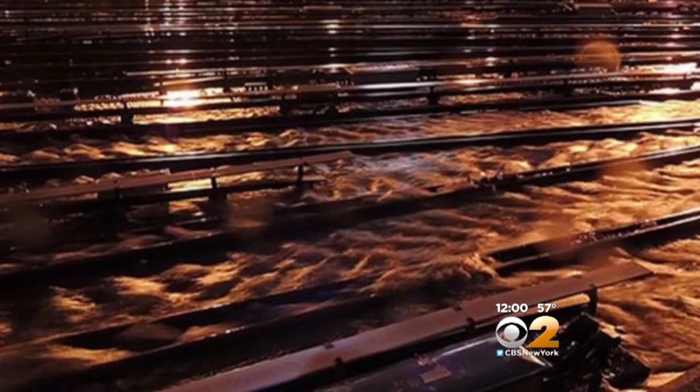At 4:30 in the morning on July 21st, 1880, a small leak opened at the top of an unfinished tunnel, buried 60 feet under the Hudson River. It was no larger than a man's hand. Within minutes, compressed air was rushing out of it, and river silt was pouring in. 28 men were inside. 8 of them would reach the airlock alive.

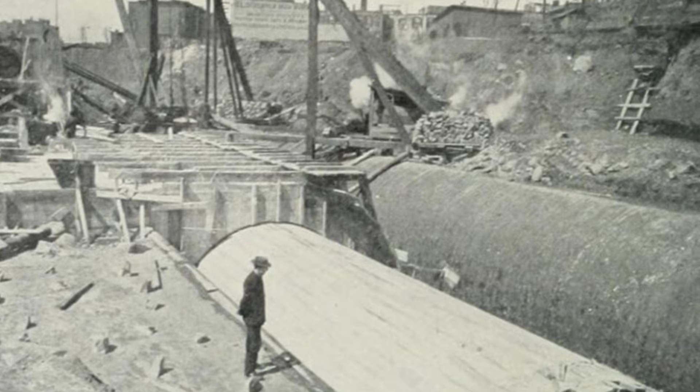The others would remain there, sealed beneath the riverbed, while engineers above stood on the Jersey City shore and tried to understand what had just happened. The project would not move forward in any real sense for the next 18 months. What stopped it was not money nor politics. It was the river bottom itself.

By the 1860s, the Hudson River had become the largest single obstacle to commerce on the east coast of the United States. Manhattan was a peninsula crowded with industry, finance, and immigrant labor, and yet every railroad coming from the south, the west, or the interior of the country ended its tracks on the New Jersey side. Goods and passengers had to be carried across the water on ferries. In ordinary weather, the crossing took roughly 20 minutes. In fog or ice, it could take hours, or it could fail altogether.

The winter of 1867 was one of the worst on record. Ferries got stuck in ice. Coal shipments stopped. Manhattan came close to running out of fuel. A man named DeWitt Clinton Haskin, an engineer who had made his money on the California Pacific Railroad and on silver mines in Utah, was on one of those stranded ferries. By the time he reached shore, he had decided that the only durable answer was a tunnel.

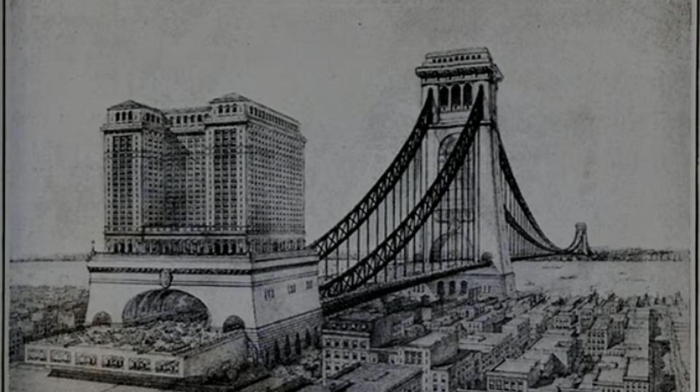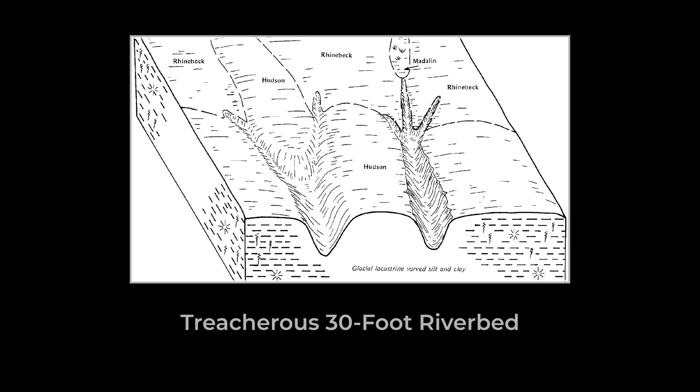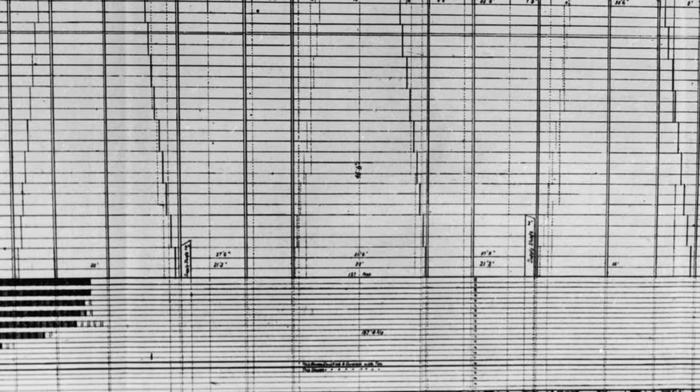A bridge had been studied repeatedly and rejected. The Hudson at that point was a mile wide, with shipping channels too active to obstruct, and a riverbed that consisted in long stretches of soft mud reaching down dozens of feet before it touched anything solid. Engineers of the period believed a bridge there would be impossible to anchor without piers driven down to bedrock, an undertaking no one in the country knew how to attempt at that depth. A tunnel, in theory, could simply be threaded through the silt below the river.

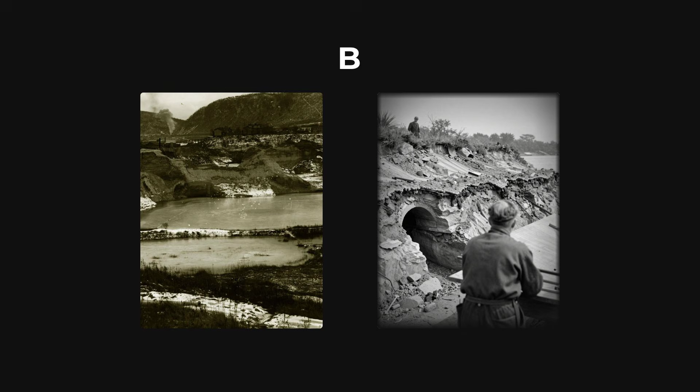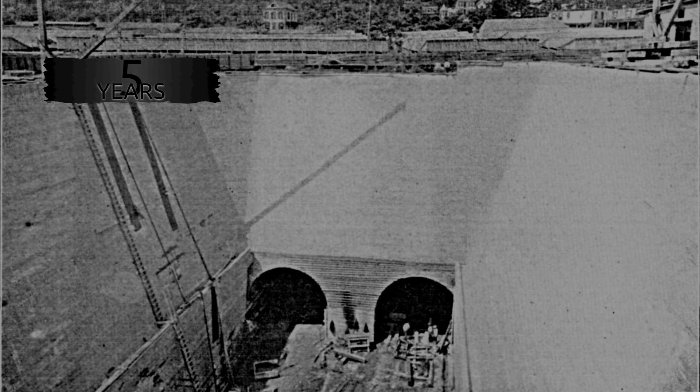In theory. Haskin incorporated his Hudson Tunnel Railroad Company in 1873 and began sinking a construction shaft at the foot of 15th Street in Jersey City the following year. Almost immediately, he was sued by the Delaware, Lackawanna, and Western Railroad, which ran ferries across the same stretch of water and saw a tunnel as a threat to its business. The injunction held the project in place for 5 years. Equipment sat under tarps. Investors grew restless. Work did not resume until late 1879.

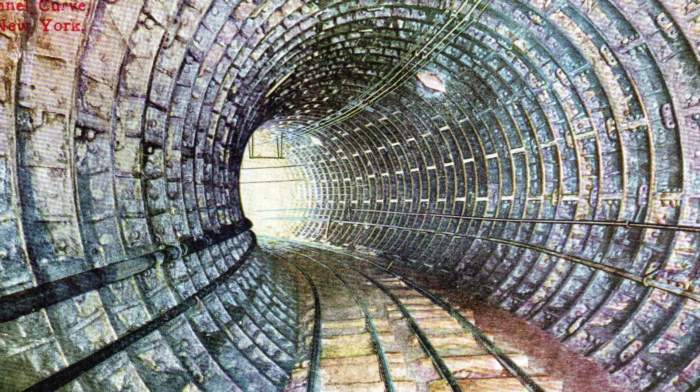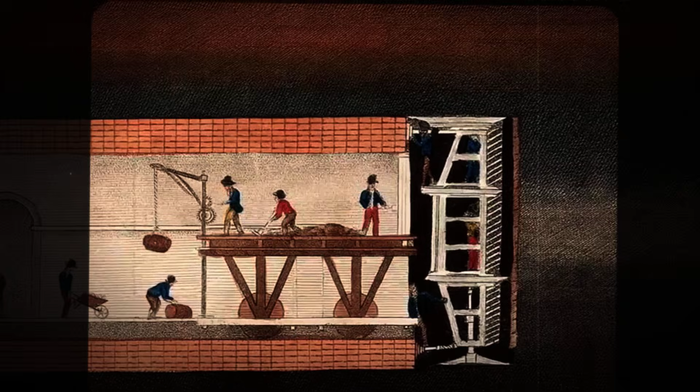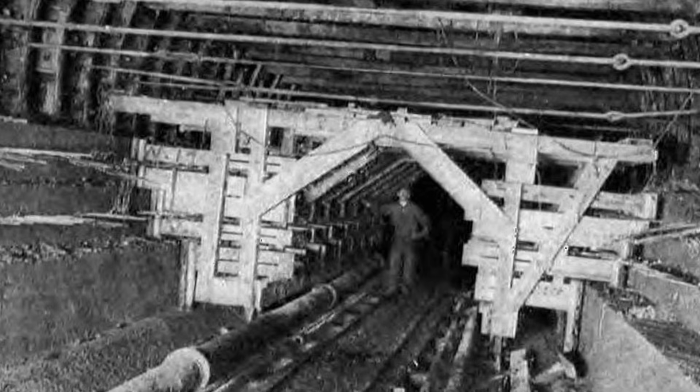When it did, the method was unusual for its time. Haskin chose not to use a tunneling shield, the heavy steel cylinder that British engineers had been refining since the 1860s for soft ground work. Instead, he relied on compressed air. The plan was to push the air pressure inside the tunnel up to roughly 35 pounds per square inch, enough, in theory, to hold back the river above and keep the silt walls in place, while workers laid an iron and brick lining behind them.

Men entered through an airtight chamber at the rear, pausing several minutes inside to let their bodies adjust, and then worked at the unsupported face with shovels and picks. The silt of the Hudson, when it carried just the right amount of moisture, behaved almost like clay. It would stand on its own. Haskin had observed this and designed his entire method around it.

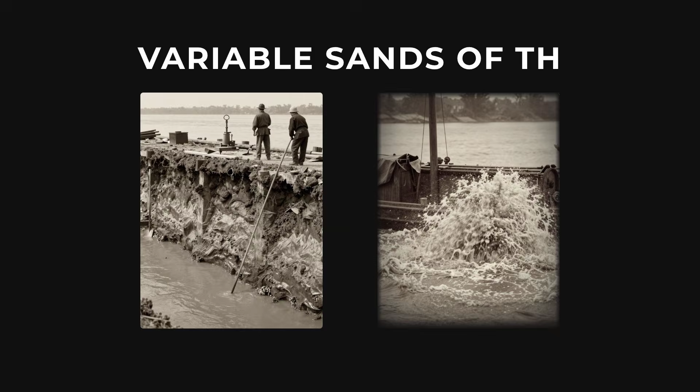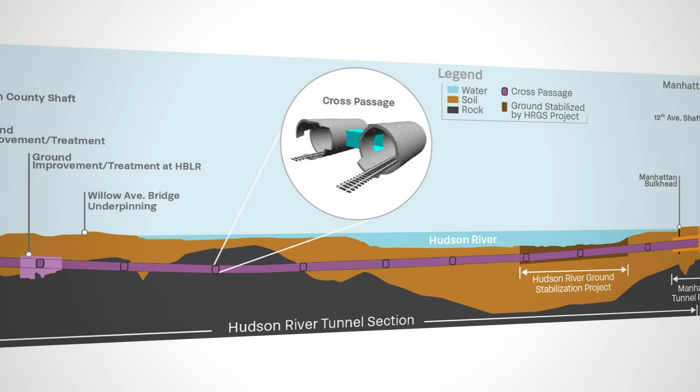What he did not fully account for was that the silt was not uniform. Its moisture changed from yard to yard. Its density changed. The pressure required to hold back water at the bottom of the tunnel was much greater than the pressure required at the top, where the silt was thinner and the river was closer. Any single value of compressed air would always be too much in one place and too little in another.

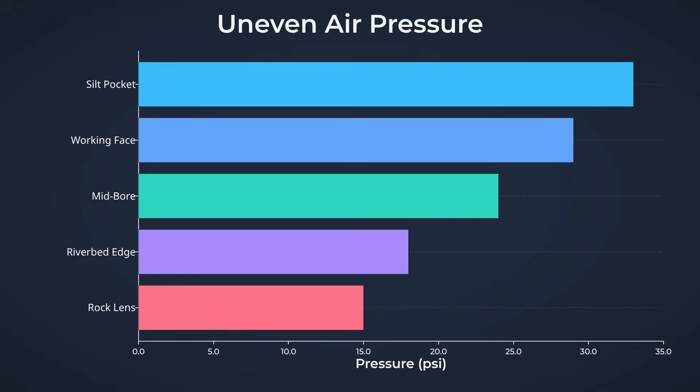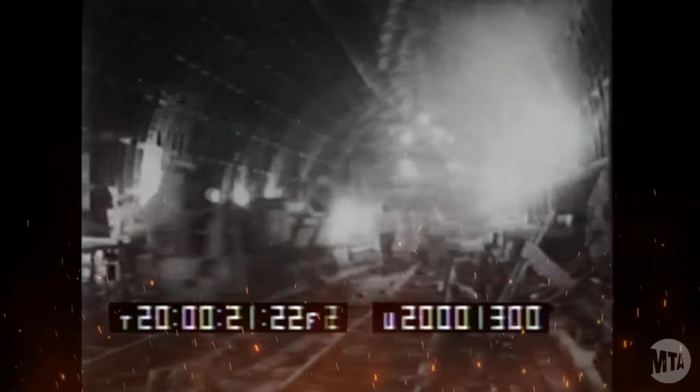The men working the face could not see this, and neither could the engineers reading the gauges. By the summer of 1880, the tunnel had advanced about 300 feet into the river. Work continued through the night in shifts. On the early morning shift of July 21st, the assistant superintendent on duty was a man named Peter Woodland. He was English by birth, an experienced sandhog, and had been with the project since it resumed the previous autumn.

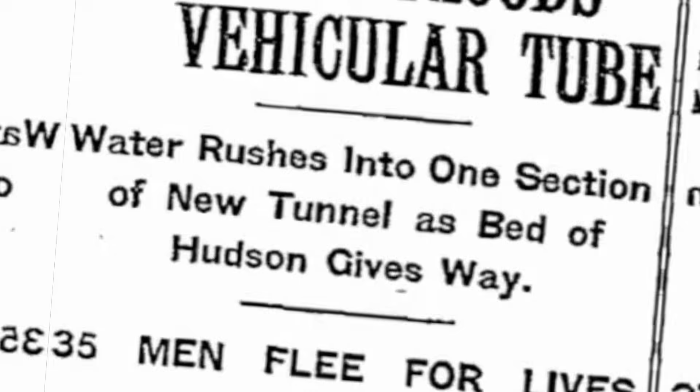A few minutes past 4:30, Woodland noticed a hiss at the top of the tunnel face. The compressed air inside the workings had found a soft pocket in the silt above and was escaping upward. As the air went out, the seal failed. River water and mud began coming in through the same opening. Woodland understood immediately what was happening.

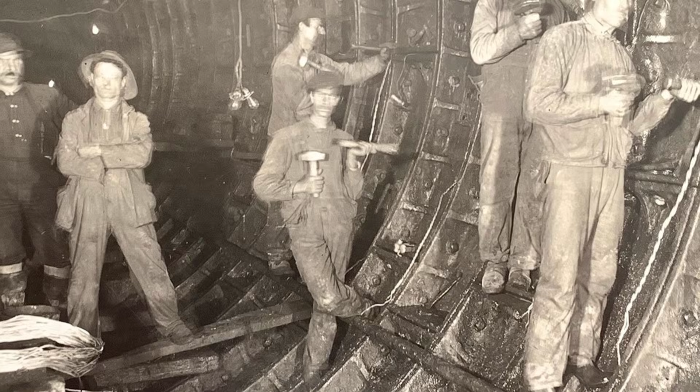He ran to the airlock at the rear of the tunnel, opened it, pushed 8 men inside, and sealed the door behind them. He did not go in himself. The 8 men in the lock survived. Woodland and 19 others did not. The tunnel filled with water and collapsed silt within minutes.

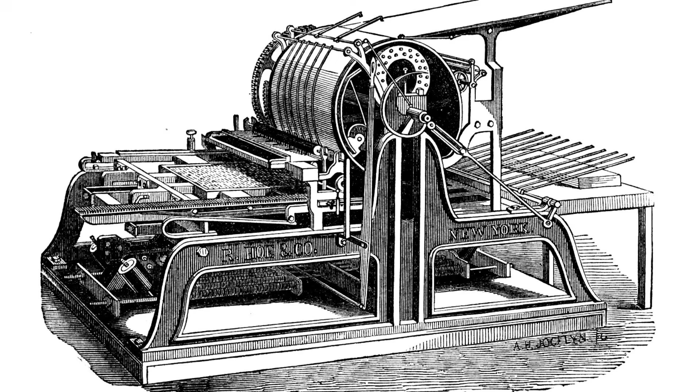When daylight came, there was a visible disturbance on the surface of the river above the tunnel line, a churning of mud and air bubbles that lasted for hours. Boats slowed and watched it. The newspapers in both states ran the story by the afternoon edition. It took 6 months to recover the bodies of the men who had been trapped. The flooded chamber could not simply be pumped out. The walls had failed. The silt was no longer holding.

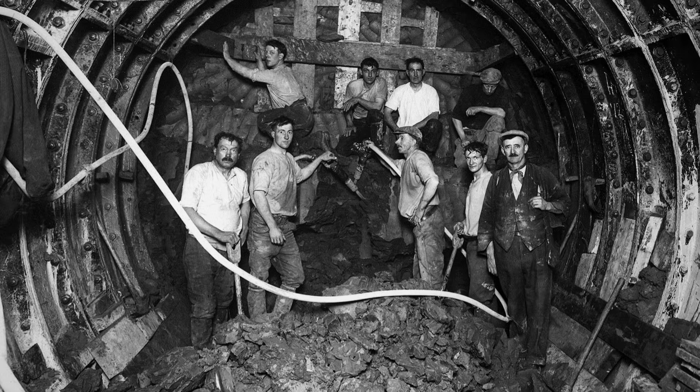At the inquest that followed, Haskin stood up and declared that he, and he alone, was responsible for the plans and for their execution. The statement protected his employees, but it permanently damaged the company's standing with its lenders, several of whom withdrew their support within the month.

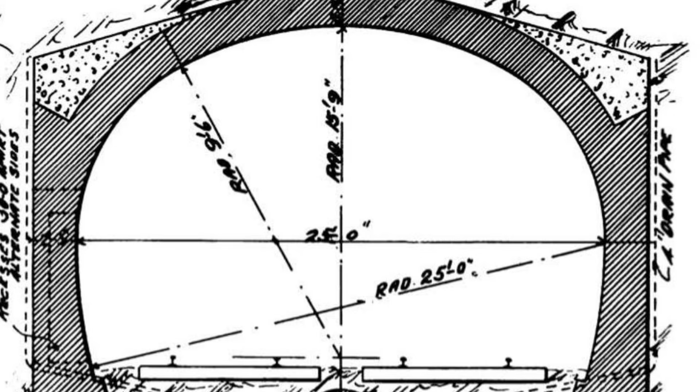What followed was the long pause that defined the whole project. The tunnel, as a working construction site, was effectively shut down for the next year and a half. There was no formal announcement. Funding continued to trickle in. Investors continued to attend meetings, but no useful tunneling was possible until engineers could solve the problem the river had just demonstrated. The first task was recovery.

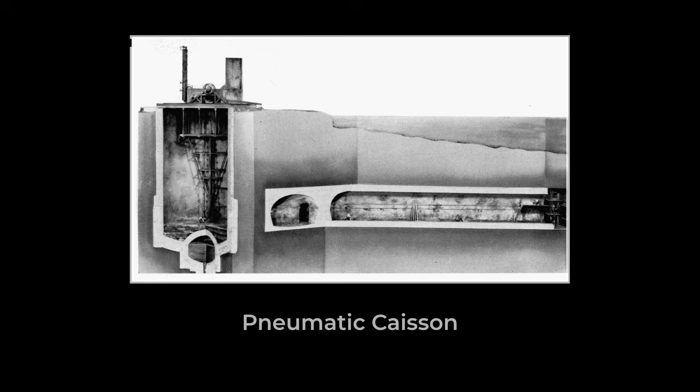A cofferdam was driven into the riverbed above the failed section, enclosing a rectangle of water and mud that could then be drained. Inside the cofferdam, a pneumatic caisson, roughly 40 feet long and 24 feet wide, was sunk down to the level of the tunnel itself. From inside that caisson, workers reached the buried chamber, removed the dead, and began the slow process of rebuilding the damaged lining in masonry rather than brick. The cofferdam alone took months to install in the moving river.

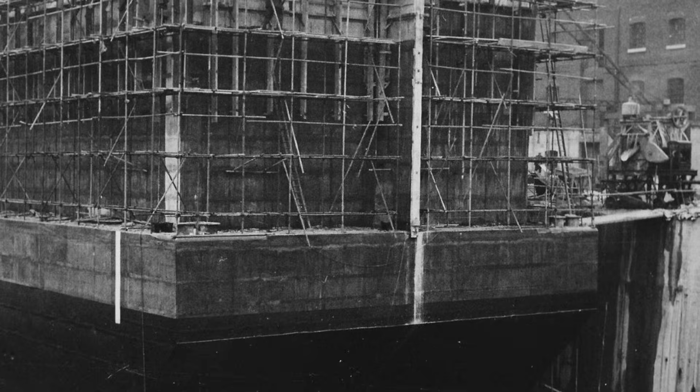The caisson took longer. While that was happening, the engineering review was running in parallel. A new chief engineer, General William Sooy Smith, was brought in. Smith was a respected figure in American civil engineering, with experience on bridge foundations and pneumatic caisson work in the Midwest. He looked at Haskin's design and found it wanting in 3 specific places. He introduced changes that should have been part of the original plan from the beginning.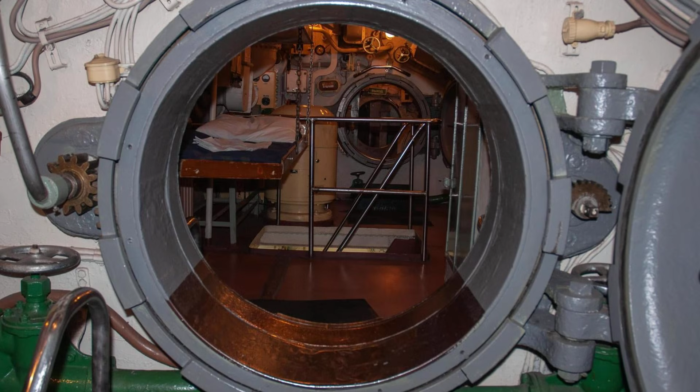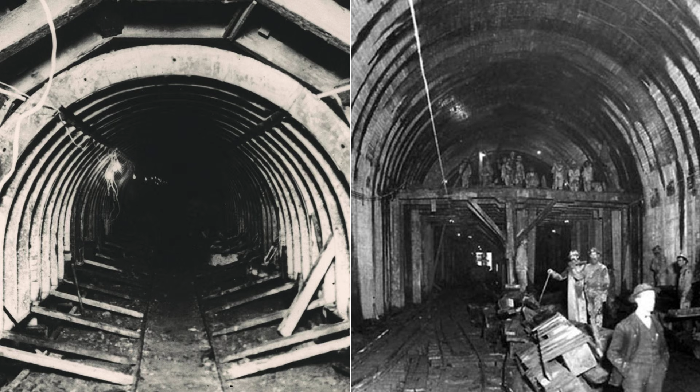First, Smith installed a permanent bulkhead near the tunnel face, with its own dedicated airlocks, so that workers could be sealed off in seconds if pressure failed again. The bulkhead Haskin had used was a simple wall of concrete with a single airlock, suitable for routine entry but useless in an emergency. Second, Smith replaced the brick lining with concrete, which could be poured in continuous sections and was less likely to crack under uneven pressure.

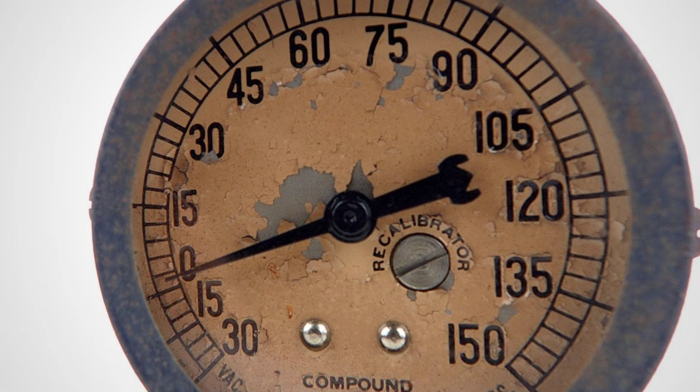Third, he added a pressurized discharge pipe that allowed excavated silt to be carried out of the tunnel without breaking the air seal at the rear, which had been a daily source of small pressure losses. By January 1882, 18 months after the blowout, a delegation of about 100 engineers from the American Society of Civil Engineers was given a tour of the rebuilt workings.

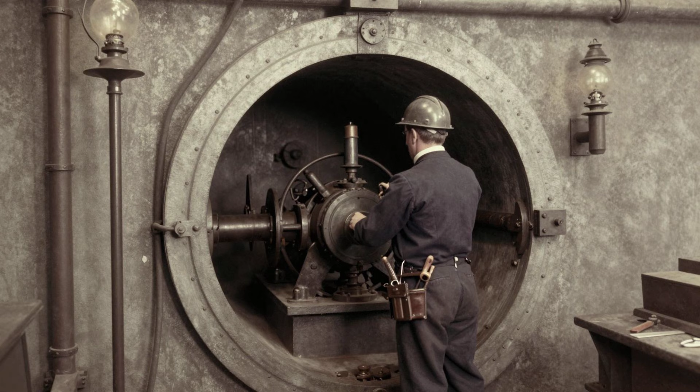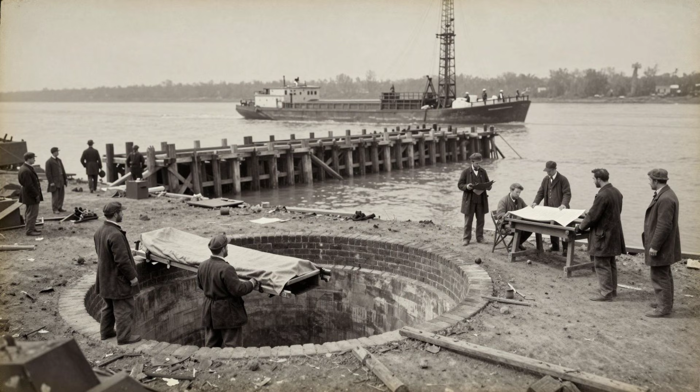They walked through the new airlock, inspected the concrete walls, and were taken later that same day to look at the Brooklyn Bridge, which was still rising over the East River under Washington Roebling. The Hudson Tunnel was alive again, but it was not the same project. The river had taught its lesson, and the lesson had cost 20 lives, the company's reputation, and a year and a half of construction time.

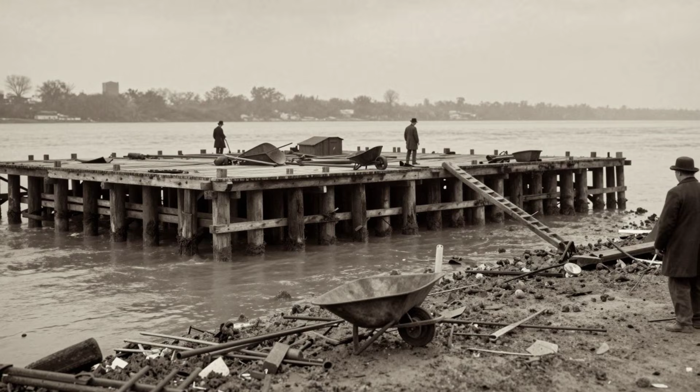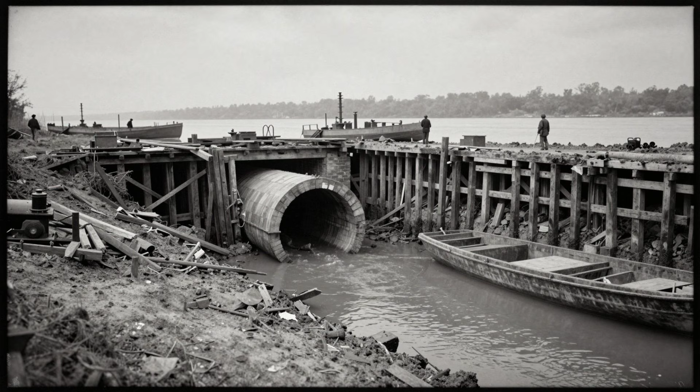The story did not end with the 18-month pause. The tunnel itself was never finished by the men who started it. Haskin's main financial backer, Trenor W. Park, died in late 1882, and the company suspended construction again that November. A second blowout the following year shook investor confidence further. Haskin restarted the work twice and finally exhausted himself in 1887, with about 1,600 feet of tube completed and abandoned beneath the river.

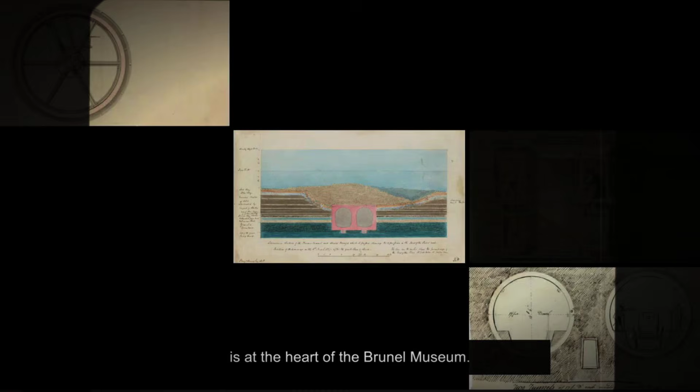A British firm took over the contract in 1888, bringing in something Haskin had refused to use. James Henry Greathead, an engineer working in London, had developed a tunneling shield specifically designed for soft riverbed material. The Greathead shield was a heavy steel cylinder slightly wider than the tunnel itself, pushed forward by hydraulic jacks while workers excavated through openings in its face.

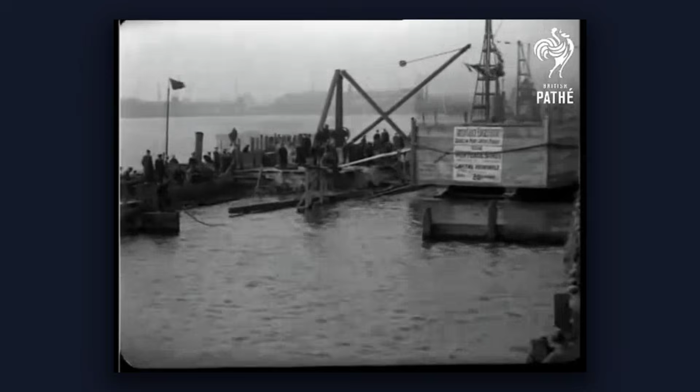The British team, working with Haskin's old compressed air method behind the shield, pushed the work another 1,600 feet before the firm ran out of money in a financial crisis in 1891. For the next 10 years, the half-built tube sat full of water, useful to no one, while the city above it kept growing. In 1902, a Tennessee lawyer named William Gibbs McAdoo bought the abandoned workings.

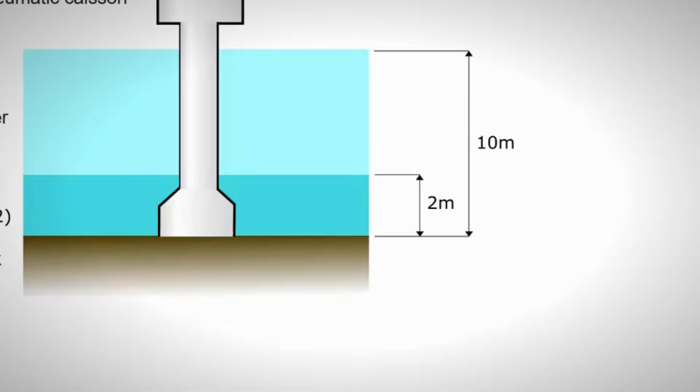McAdoo was not an engineer. He was a man with a talent for raising money and choosing the right people to spend it. He hired Charles Jacobs as his chief engineer. Jacobs had built New York's first underwater tunnel, a small gas main bore beneath the East River, and he understood the Hudson silt as well as anyone alive. He used a mechanical shield, electric locomotives to remove spoil, and an air pressure of 38 pounds per square inch. Progress, for the first time in the project's history, was rapid.

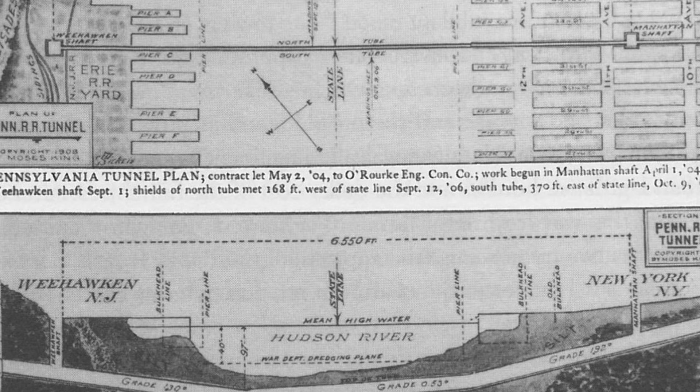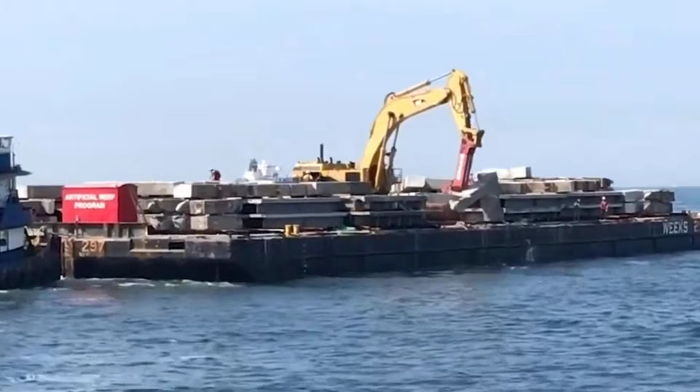But the Hudson had one more obstacle waiting. As the shield approached the Manhattan side, it ran into solid rock, a reef of bedrock sitting only 1 to 16 feet above the planned tunnel grade, cut directly across the path. The original plans had not predicted it, because no one had drilled deep enough at that point to find it. The silt above the reef was thin in places, and any blasting risked a blowout straight through the riverbed to the open water above. Jacobs dynamited through the reef, one careful charge at a time, dumping clay onto the riverbed from barges overhead to thicken the cover before each blast.

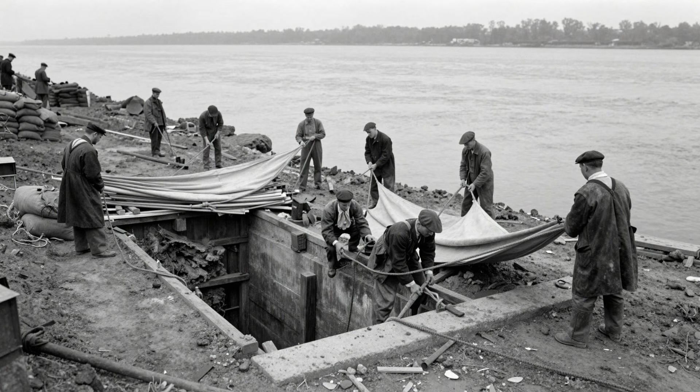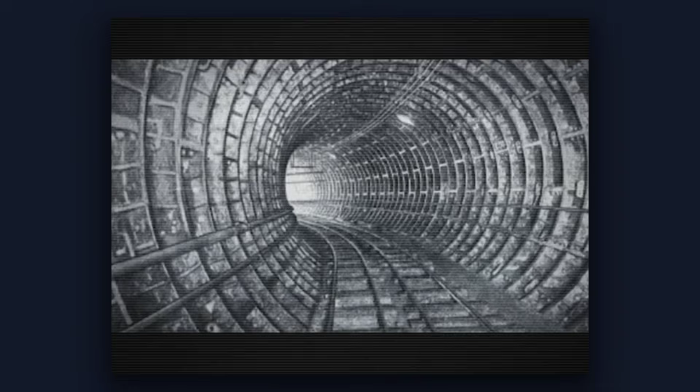The work took roughly 11 months. One man was killed when a charge failed. Several blowouts occurred and were stopped through methods that border on the absurd. In one case, the leak was plugged with 3 canvas yacht sails tied together and stuffed into the breach by hand under pressure. The first tube was holed through on March 11, 1904, almost exactly 24 years after Haskin had first put a shaft into the ground at 15th Street. The second tube followed in 1905. McAdoo himself walked through the completed tube from New Jersey to New York that day, the first man to cross under the Hudson on foot.

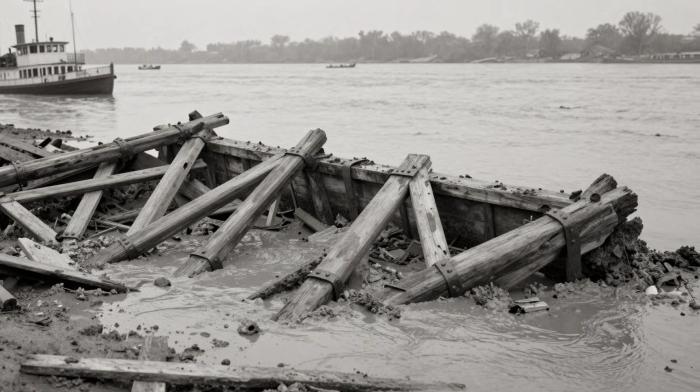On February 25, 1908, President Theodore Roosevelt pressed a button in the White House that sent power to the third rail. The tunnels opened to passenger service that night as the Hudson and Manhattan Railroad. Nearly 100,000 people rode them in the first 24 hours. Today, they carry the PATH train. Roughly 200,000 people pass through them every weekday, most of them with no idea that they are riding under the river, through a tube that took 34 years, 2 financial collapses, 21 deaths, and 1 buried reef of rock to complete. The river bottom that stopped the work for 18 months in 1880 is still there. It has not changed. The engineers simply learned, very slowly, how to listen to it.